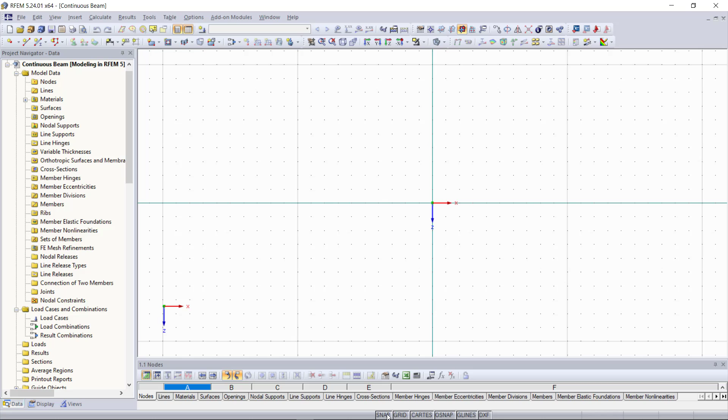So the grid is dividing our graphical user interface into regular sections, and we are able to activate or deactivate the grid down here. Then next to the grid there is the snap option. If we activate the snap, we can snap automatically certain points, like to insert a new node. If we go up here and then say new node, you can see we can snap these grid points, but if the snap isn't activated, it's not that easy to snap a certain point.

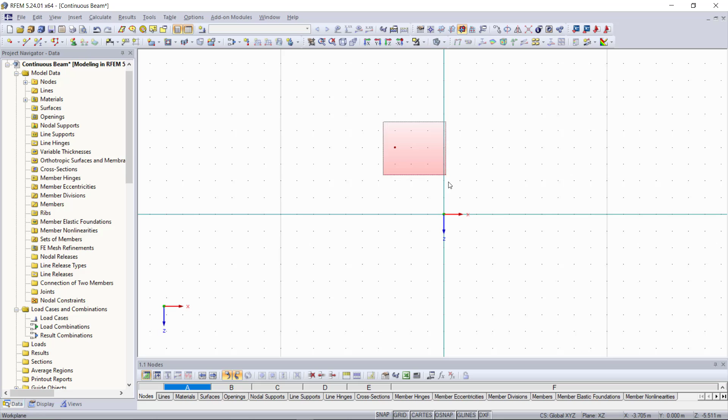And this is also going to be very helpful for us in this clip when we are entering the lengths for the beam element later in the graphical area. Back to the grid, with the right click we can choose edit, and then we can open the grid and snap settings. As you can see, we can activate or deactivate the grid or a snap in this dialog as well. Then of course we can choose the type of grid that we want, like Cartesian or polar.

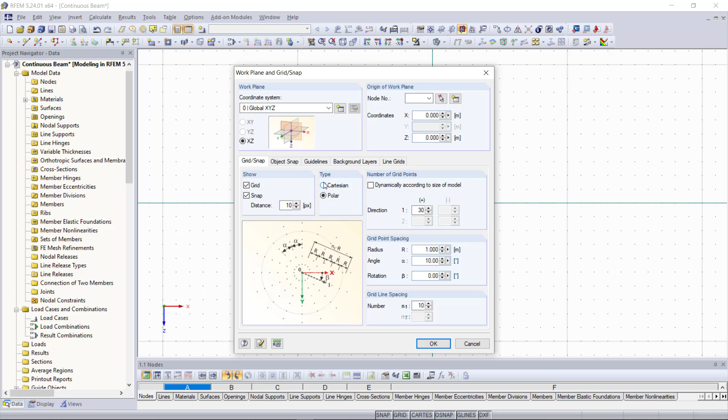Next, there's the option where you can set the number of grid points in each direction. And then we can activate up here the option dynamically according to size of model. This will allow our grid to get adjusted automatically to the size of the model. Down here we can set the space or the distance between those grid points, but we can keep that as 1 meter for our example. Then grid line spacing, we can keep that at 10 as well. And we can click OK.

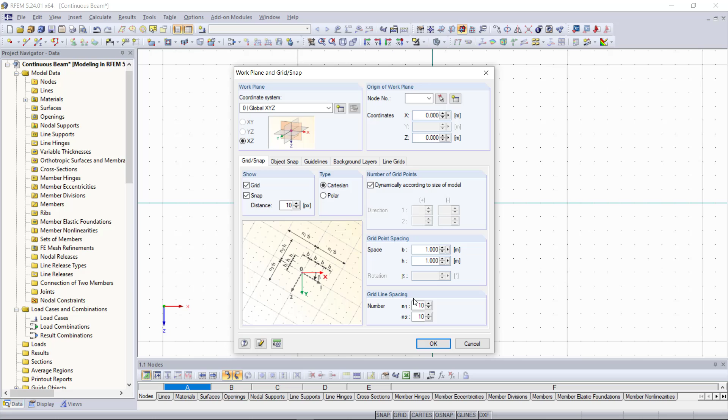So now to get started with modeling our beam, for the direct input of data here in the graphical area, we can do that either up here on Insert, and then we can find here Graphically, or using this toolbar down here where you can find almost everything that you need. During this video we will use this toolbar as it's quicker to access those commands. So unlike the previous two examples where we created in advance the member, nodes and lines, we are going to create the member directly in this example.

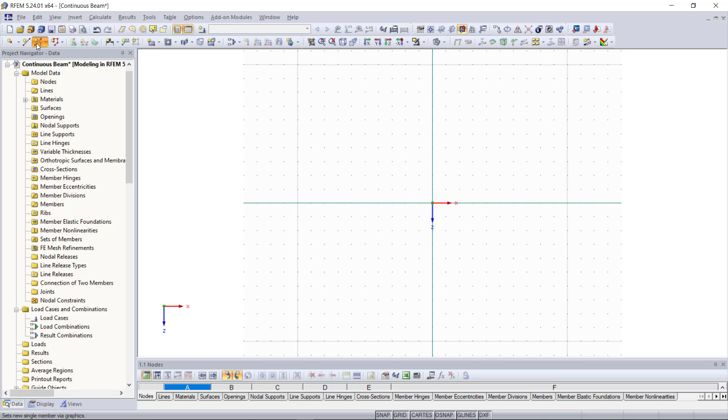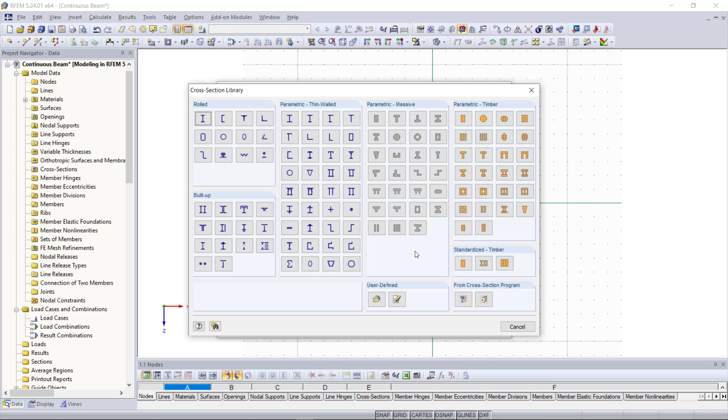For that we go up here and then we can find new single member. We already know this dialog from our last video. Again, all we need to do is to define a cross section and a material, which we can do down here on the cross section. And we click at this button here called import from cross section library. Then we can set the cross section as we've already done in the last video. Down here we will enter our material properties and then we can click OK.

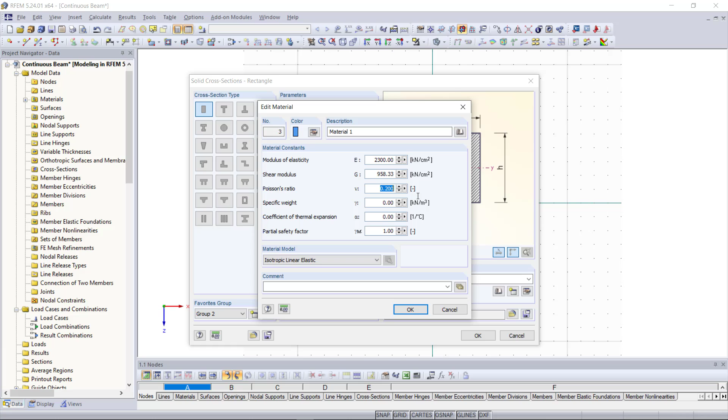Then we can have a look under cross section if everything has been taken over as we'd like to, and then we can click OK once again. So now we can select certain points with a click in the graphical area and define the start and end points of our beam. And since we have activated the snap option, it's very easy to select these points.

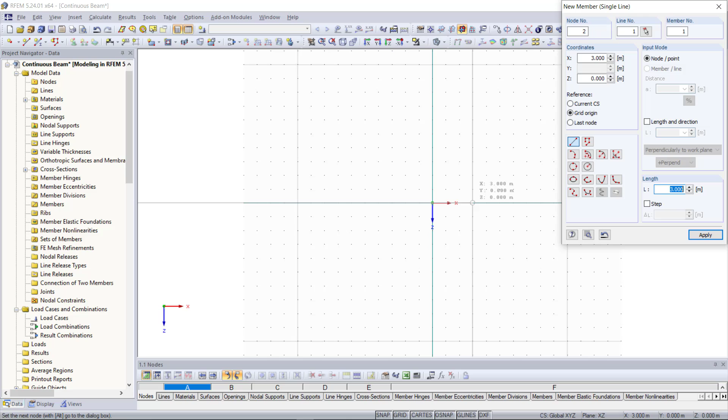So our first point will be again the origin, 0 and 0, and you will notice that the coordinates of the point that we choose appear here, and that's also very useful. Then we can click at this grid point. The second point will be 3 and 0, and the last point will be 6 and 0. With right click we can exit out of this command.

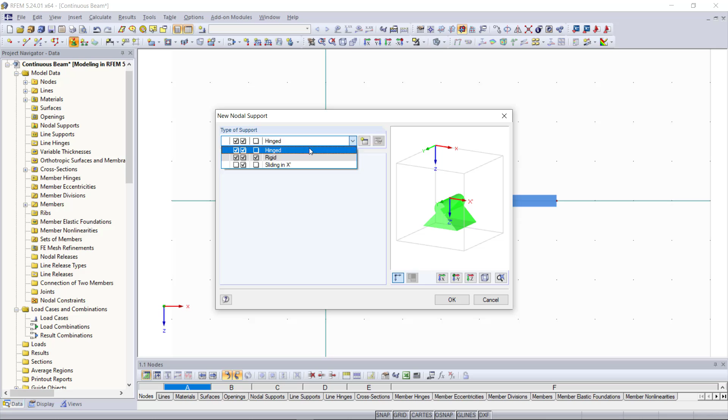Now that our member is created, next we will insert the supports, and again we go up here in the toolbar and choose nodal support. Then in this dialog we can set our support conditions, and the first support will be a hinged one. We click OK, then we can graphically choose the point for that support, and you can see now the support is created. We do exactly the same for the other two nodes, but those will be able to slide along the x-axis, so we choose sliding in x.

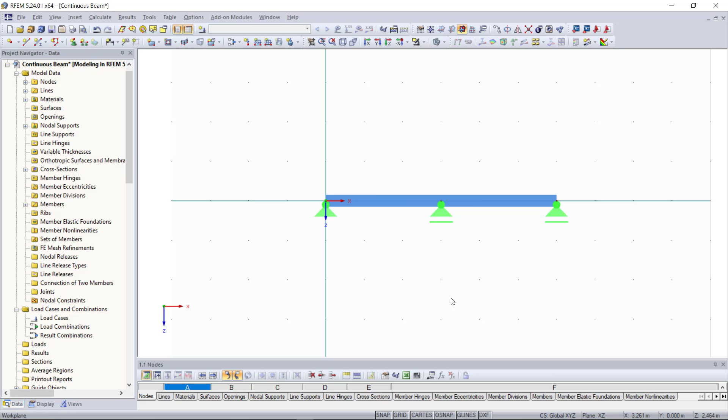The next thing that I want to show you is not really necessary for our example, but it makes the calculation sometimes easier, especially if you have more complex structures. Right now, as you can see, we have a system of two members, the first one here on the left side and the second member on the right side. And we can merge these two members to a set of members. For that, we will select these two members. We can do that with the control key and left click.

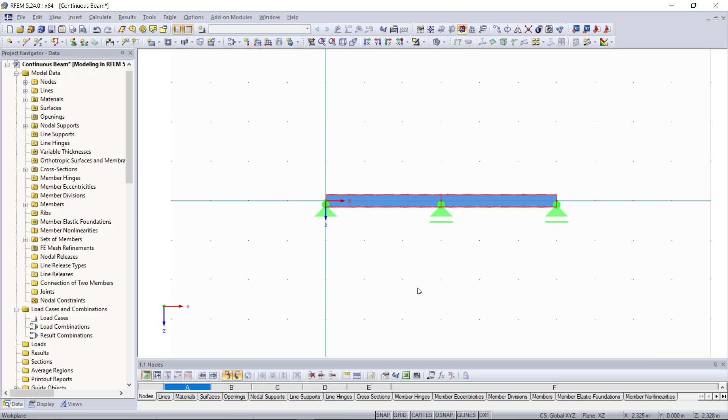And then with right click, we can find create set of members. Here we choose as type continuous members. Since we have them already selected graphically, we can see here that these two members are set automatically in the section. And with OK, we can close this dialog. Now we can see here's a frame around our members, which shows us that these members are now a set of members.

What's missing now, of course, are member loads, and for that we can find up here in the toolbar this button called New Member Load. And if we click here, the window for load cases appears at first, since we have to define a load case before creating loads. Here we will choose all loads and turn off the self-weight. Next, we can define our load.

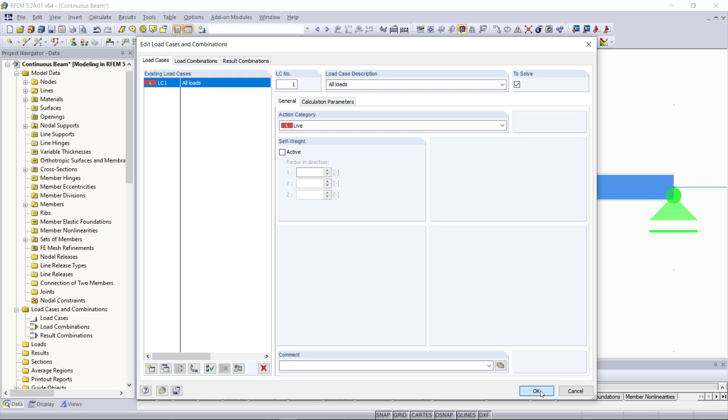Here we change reference to from members to sets of members. As type, we can choose force. As direction, we can keep that in the Z direction. Our load parameter down here will be 5 kilonewtons per meter. And then again, we can assign the load graphically to our members.

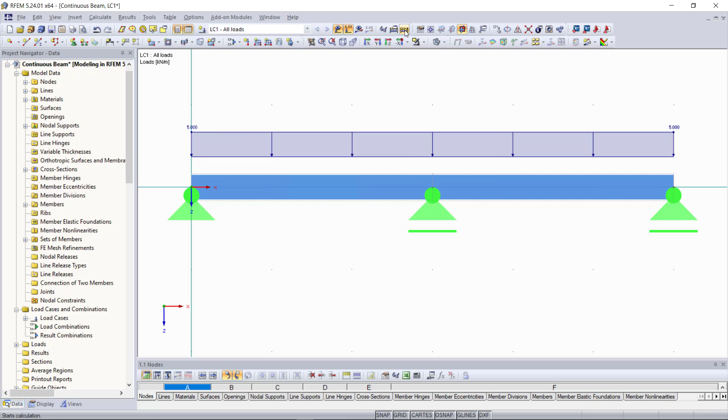Now that our system is complete, we can go up here and calculate this one. And then we can see our results. We change to the wireframe model, and then our results like deformation and internal forces can be displayed. So this was our third part of modeling in RFEM 5, and in the next upcoming videos we will learn how to model different types of structures.